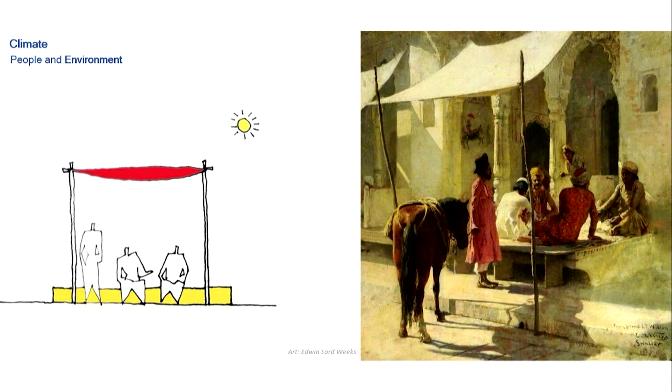Secondly, what becomes important is the idea of the object that people inhabit, and how that starts relating with the scale of space. Thirdly, the environment, and obviously the climate - here you see a temporary pavilion, but this activity can even happen under a tree.

That takes me to another idea - as human beings we have the gift of hands, and that's something we can use to do many activities. I've used the example of a Swiss knife because that's what it does. If a human being is so diverse, then why do we design buildings that just perform one function?

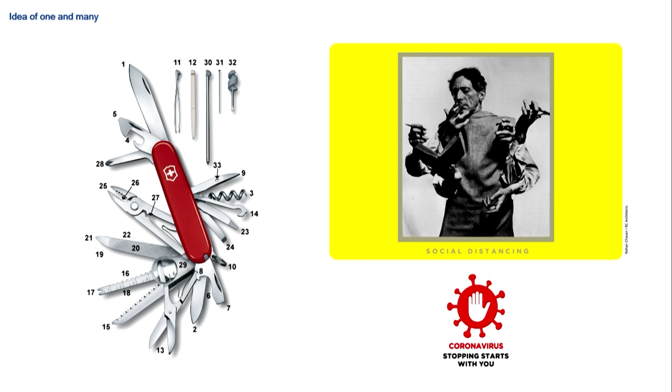So in that context, I will just play this little video that shows the Light Box. That's the first project that we did five years ago.

What was interesting is the moment we strapped the site with this plastic tape, the concept of resting started appearing within the site - before, no one sat under the tree, but the moment we defined it with the plastic strip, people started inhabiting that. At that moment the concept was kind of successful in a way.

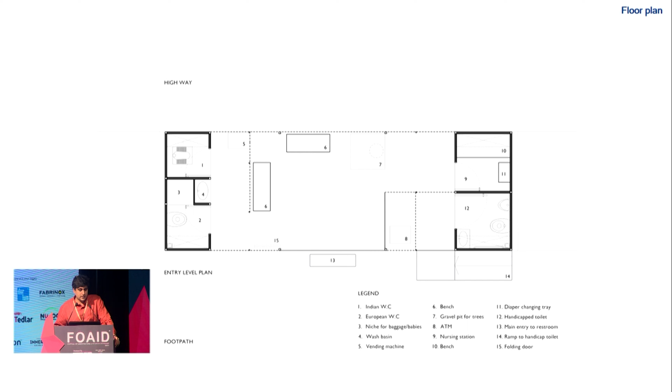That's the plan - we have the toilets and the resting space. For me, this is not a project of a toilet; in fact the central space, which means nothing, is actually the real project, because that is something that allows it to interact with the city and the people, and has many more layers to express.

That's how the transparent skin encloses the central area, which still doesn't define it with a very solid surface, but allows one to see through.

If you see the atmosphere inside the restroom and the city, it's the same - in a way it tries to interact with the outside. Similarly, from the other side, the tree kind of cuts through the roof, and there's a lot of natural light and ventilation within the space.

This is a drawing expressing many layers of the project in terms of the architecture.

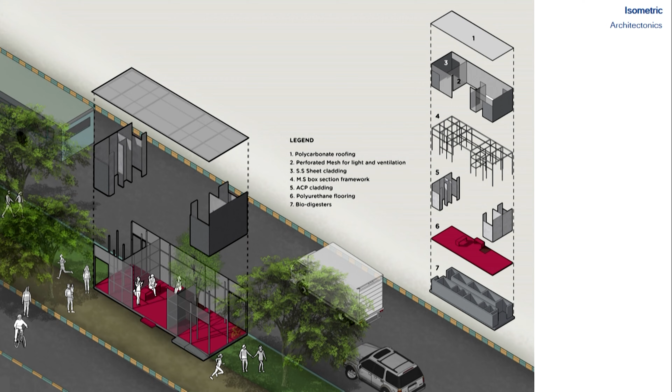Going ahead, we created a family of restrooms. Within the city there will be many spaces, different locations where one can locate these restrooms, so we thought there could be variants - small, medium, large, and extra large. The large is the one we saw, which is currently built. We replicated 14 units within the city of Thane.

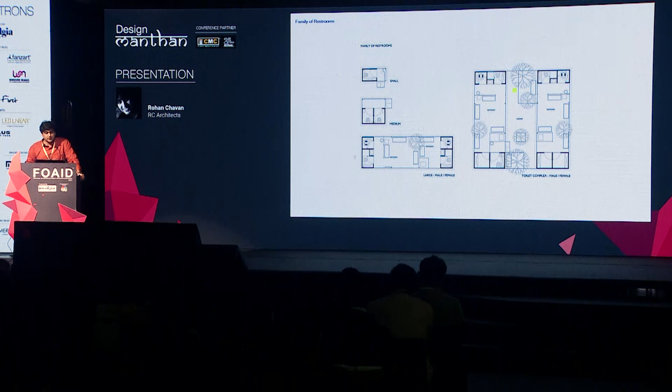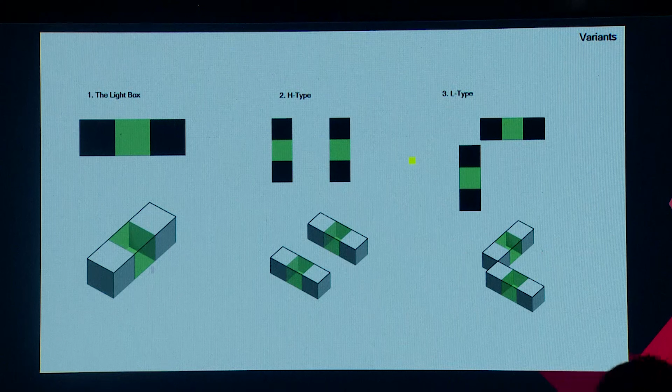And that's again the diagram. So later we went on and we are still working on this idea, how this diagram of Lightbox can postulate itself and mean many more infrastructural elements within the cities, not just toilets, but many other small infrastructure related to small scale industry and domestic jobs. So there are various permutations and combinations one can see.

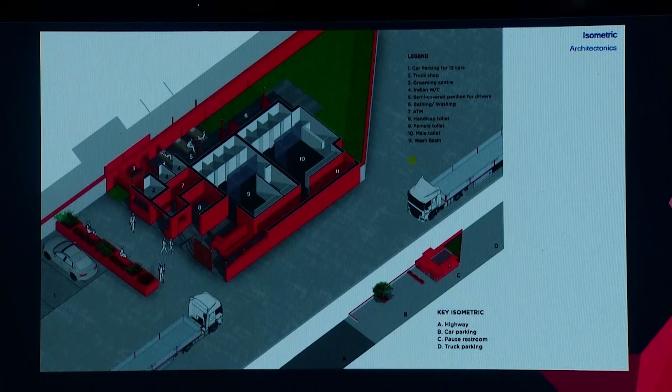The next issue we started encountering was of the truck drivers, because we started working on a project and then realized that the truck driver community is falling short of amenities, and as a result the number of truck drivers per 1,000 trucks are getting reduced. This project is a reaction to that. This project is called Pause Restrooms, located on the Bombay-Goa highway.

That's pretty much how it's laid out. It has multiple access points, so you have a choice. When you enter the campus, you have a choice where to go.

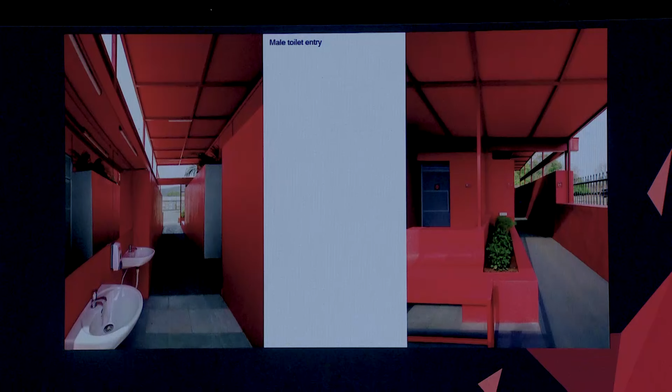These are some pictures of the main facade, and that's how you enter into the spaces. The spaces are designed in a very domestic character, though the building is very contemporary, but we tried to design it in a way that people can inhabit these spaces. These are the interiors.

That's the entry to the male toilet. Inside spaces.

Particularly for this project, I thought the signage system becomes very important because one has to communicate with the users, since there won't be a full-time watchman present who can guide people across. So we had conceived the signages in 2 different languages, so all age groups and different community members can understand this.

This is some iconography that's developed. Then the door metal signs.

Then these are some programs we included within this facility, like a grooming center and tuck shop, because that was the necessity of the truck drivers - that was one requirement. A grooming center can help them rejuvenate and carry on their journey.

The recreational spaces - if you see, the beds are very traditional, what they feel comfortable with, but the building is modern, so we try to blend the objects with the building. And that's the side facade, that's how this facility looks.

This project has a full-time staff who take care of the entire facility. They are trained to clean. So that was the reaction to the problem, and I think I'll just quickly jump on.

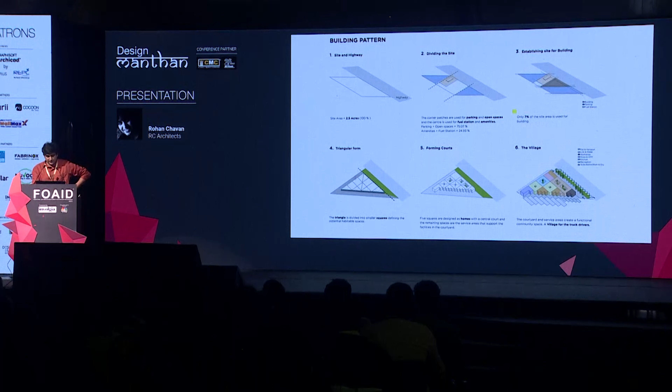So this is how the building was conceived. We have a parallelogram and then divided into 2 triangles. The triangles were used for parking, and the remaining triangle was the building. So in fact this house was like a set of many.

This village was a set of many houses, and each house offered various activities. One house offered food, the other house offered entertainment, relaxation. So that's how this village was conceived.

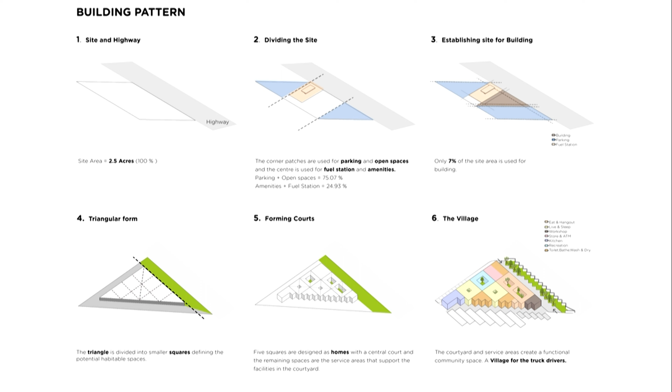I'll just quickly run through. The time is up, so I'll just show you the last project, which is again in reference to this. That's a transient housing for again the truck drivers.

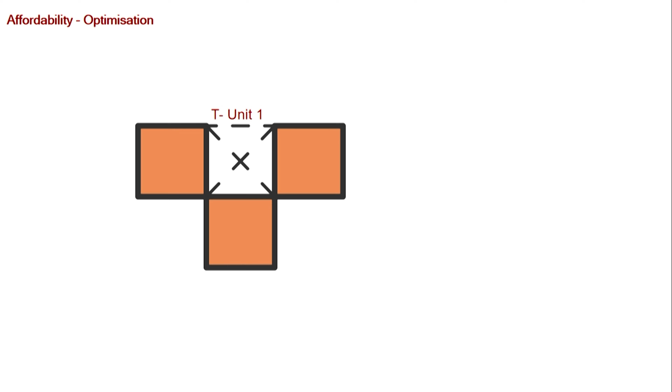This is only a housing project where we try to create shared facilities as well as housing for the truck drivers, where to create an affordable and optimum unit design, we tried to create houses where 8 truck drivers can occupy at a time, and then another 8 and another 8. The shared common walls make construction optimum, and that's how it's laid out.

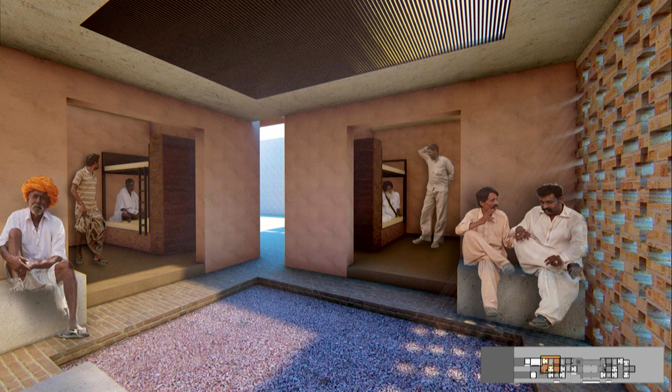And these are the common courts where they can live, sleep, and interact. This is more like a transient housing on rental basis, so maybe they can just pay a minimum wage of like 250 or 500 and stay for a night.

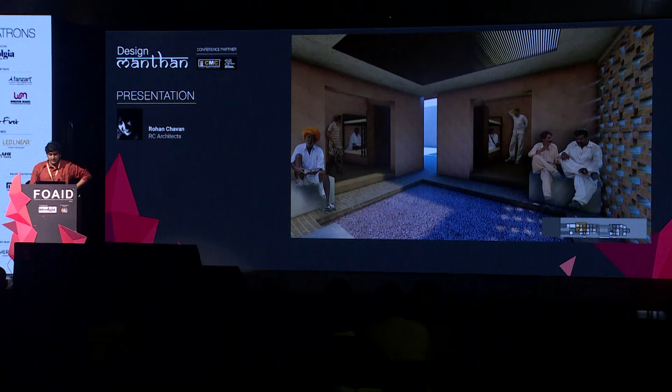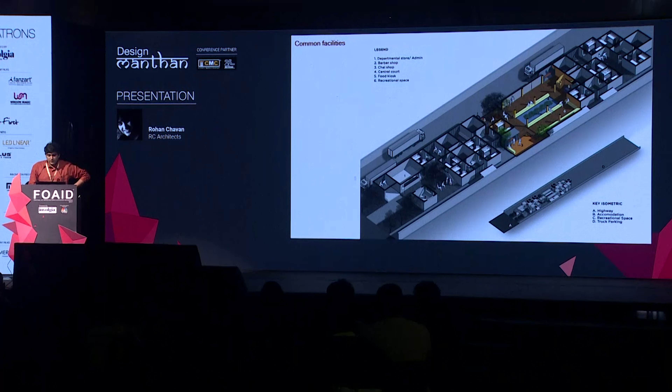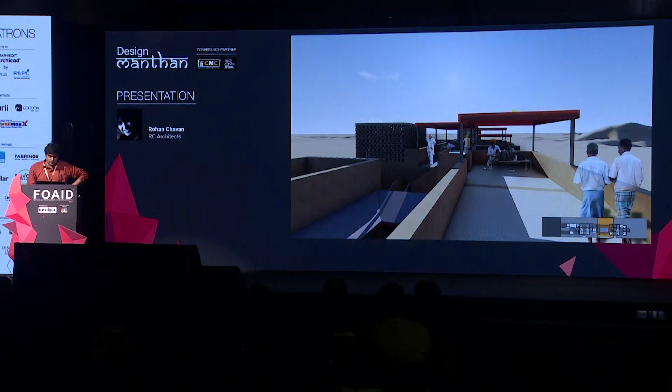And so here you can see the idea of micro-climate has been expressed, and that's what we are trying to do through many of our projects. Those are the common facilities for the entire community - very basic, like dining and kitchen facilities, and the recreational spaces on the roof as well as on the ground.

So this is how it's laid out. It's a very small project, but the intent and the vision has to do with a larger narrative.

And this is something I would like to share - this was written by Correa, with whom I worked for a brief period, and it says we are only as big as the question we address. This, to my mind, is the central riveting fact of life of architects in the third world - not the size of the project or its value, but the nature of questions these projects raise. I think that is something we must try to confront, and that allows us to grow not only as architects but as people.

And in fact, this is a privilege for people in the tropical climate, because we are living under the sun constantly, and that's what allows us to express these many layers of architecture. Okay, thank you.